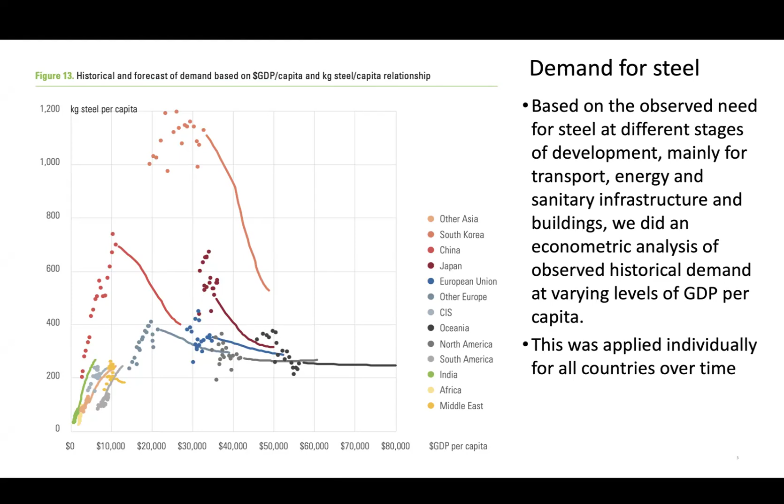This led to this picture of history and forecast steel demand by major region. You see the increase in steel demand from the early 2000s through to 2020, and it eventually stabilizing out at about 2.2 gigatons in 2030, with a stabilization occurring because while steel demand is dropping in China, it is increasing in other parts of the world, specifically India and Africa and other parts of Asia, with most of the OECD being roughly stable, mainly for replacement of existing steel needs.

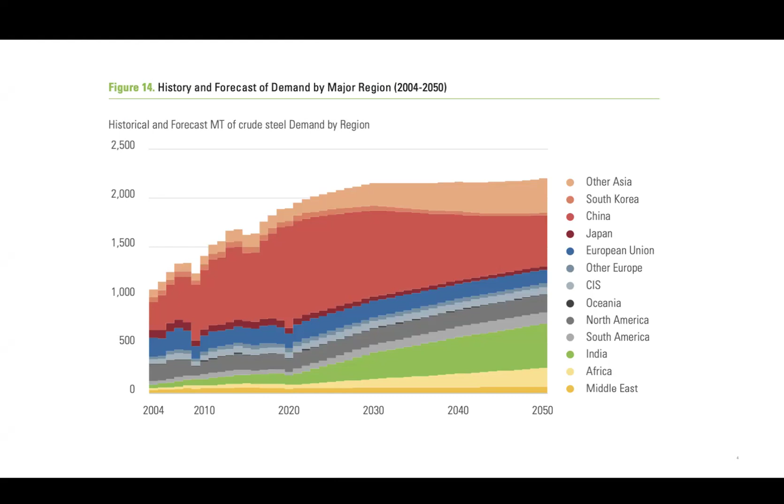Now, to briefly review for those who are not familiar, I will review how steel is made both by the primary and secondary routes. First, about 70% of steel was made using fresh iron in 2020, where fresh iron was combined with metallurgical coal inside a blast furnace, and then the liquid iron is sent on to what's called a converter or basic oxygen furnace, which sets the correct level of carbon.

This pig iron is then moved on to the refining stand where it's combined with necessary alloys to make whatever grade of steel is required, and then it is cast and pressed into the various shapes and forms that are needed, the longs and flats, with longs being generally structural steel and flats being things like flat steel for making cars or pipes.

Now, the second route is the secondary route where we use scrap iron, and about 25% of steel was made this way in the early 2020s. Scrap is brought in, it's sorted, and as much copper and other contaminants are removed as possible. It's then melted in an electric arc furnace, and the liquid steel is then moved on to the refining stand where the correct proportions of different metals are set for whatever grade of steel is required.

You'll notice that 70 and 25 add to 95. 5% of steel demand is met with what's called a direct reduced iron furnace. And I'll tell you a little bit more about that in just a moment.

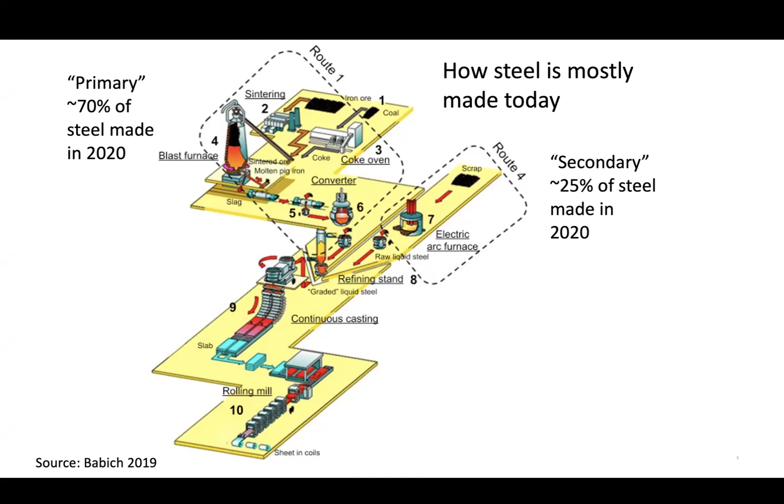Now, a key thing to note is that 85% of steel greenhouse gases come from the blast furnace basic oxygen furnace route, where coal is brought in as the reductant and heat source, and the coal is oxidized to CO2, which is released to atmosphere.

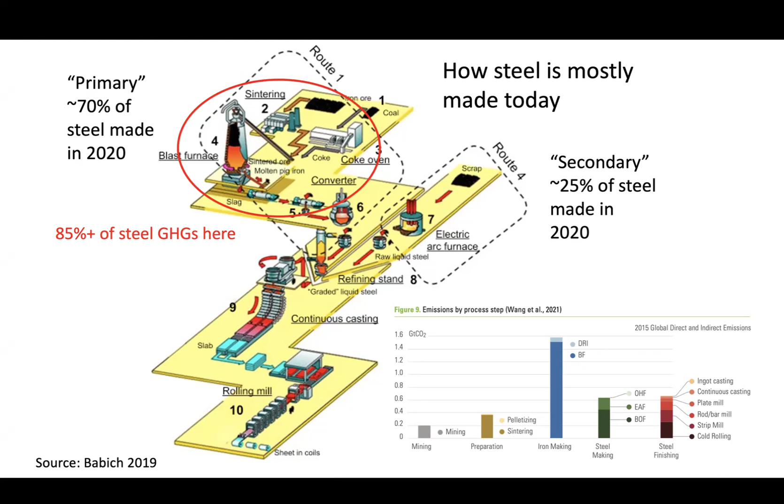For the secondary route, the primary source of emissions is the electricity for the electric arc furnace. And if we can assume there is policy to decarbonize the electricity supply and to replace all the heating with electricity, this route can be largely decarbonized with only a few residual emissions. And I do encourage you to download and read our report for details.

Now, starting with the Global Energy Monitor's Steel Database, the global steel fleet was geospatially mapped out by location, size, type, and age, creating a baseline emissions picture for the simulation to start. We have a mapping of the age and spacing of facilities in the world out through time, starting in 2021, with the reds representing blast furnace basic oxygen furnaces, the yellows representing electric arc furnaces, and the grays or dark greens representing syngas DRI furnaces.

You'll notice that most of the world's steel production capacity is in China, just over 50%, spread across the country. And the rest of Asia holds most of the other proportion, with just about 130 megatons in India and fast growing. Lots of production in South Korea and Japan, and there has been since the 50s and 60s. And then we also see a lot of steel production in the Middle East and other parts of Asia.

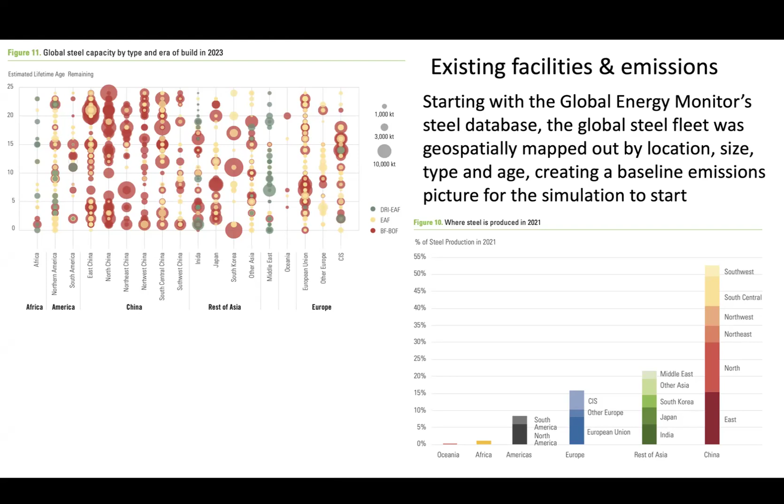The European Union is still a strong legacy steelmaker, and in the old CIS or residual countries of the Soviet Union there's still quite a bit of steelmaking capacity, with the Americas in the tail end representing just under 10% of total production. You'll see how this maps out globally in the bottom left here.

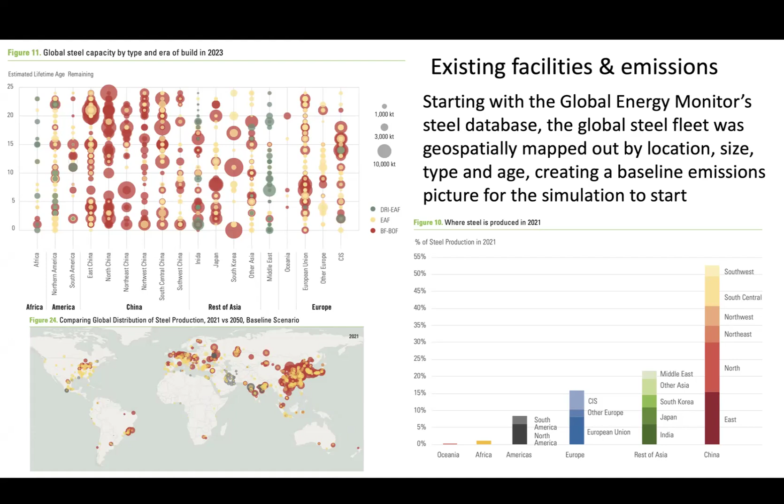The reds represent blast furnace basic oxygen furnaces, the yellow electric arc furnaces, and the grays syngas DRI furnaces. You'll notice in North America, it's mainly electric arc furnaces now, with only a few primary facilities left. So roughly 70% of U.S. steel is made with scrap, and 30% with the primary route.

China produced a lot of steel through the early parts of the 2000s. This is going into buildings, infrastructure, what have you. And it's estimated a lot of this could come out and be available for scrap for production as we head out through 2050. It's one of the biggest increases in sources, with most other regions seeing this as well. Now, remember, this is the maximum amount of scrap that's considered to be available from the literature. Not all of this will be used.

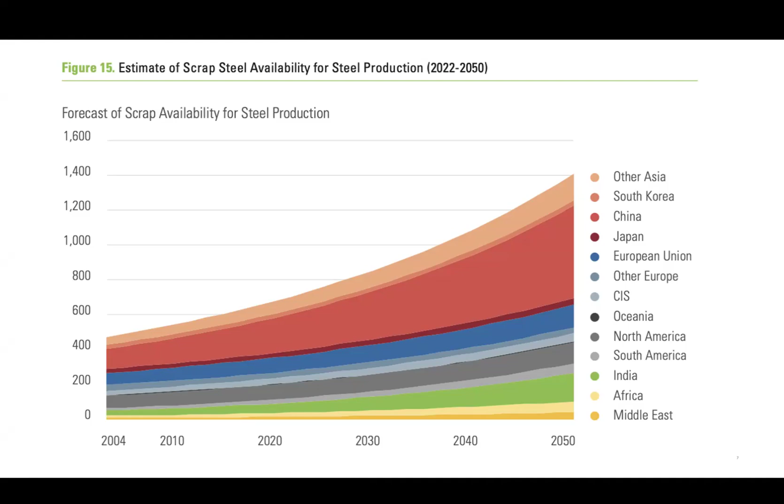We now provide the following bolded options for decarbonizing primary iron ore reduction and steelmaking. First, up to 26% reductions through design for material efficiency by 2050 are incorporated in our demand. More recycling. As we noted earlier, there's more scrap going to be available, but it depends on the supply of scrap and a network to gather it. An interesting thing happening in the US is there's a lot of combination of scrap and primary iron. It's been quite regular to make 50% scrap, secondary and primary steel, and some companies are going as high as 80, even 90%.

We do not have blast furnaces with carbon capture included in the analysis, simply because not enough progress has been made with these to bring them into the steel fleet by the late 2020s. This is unfortunate because they can use poorer quality ores, but they simply have not been commercialized. This could change, however. There are other promising coal-based technologies, advanced smelting with CCS, where oxygen is injected. There's no coking. It produces relatively pure CO2, which is easier to do CCS on. But unfortunately, this technology seems to have gone somewhat dormant.

Which brings us to the DRI technologies on the right. 5% of the global steel fleet runs off DRI, based mainly off gas, but there are some coal facilities. The gas or coal is turned into a syngas of hydrogen and carbon monoxide. The monoxide provides the reaction heat. The hydrogen takes away most of the oxygen as water. And you get a halving of emissions intensity going from the blast furnace basic oxygen furnace route to DRI EAF. It is unfortunately designed for better quality ores, and there are less of these available.

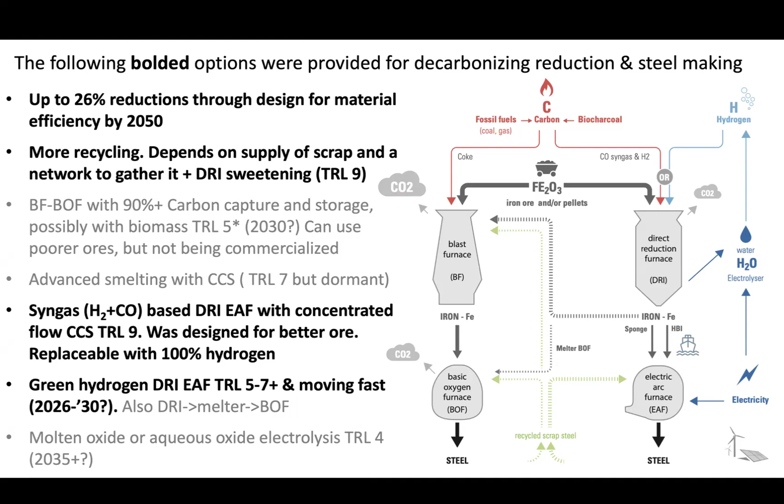The key thing here is that the syngas of hydrogen and carbon monoxide is replaceable with 100% hydrogen, which can be made either from methane or from electricity. And most investment has gone into the green hydrogen DRI route, mainly in Europe, but now there are some facilities announced in the US. This technology has been moving very fast. The only thing holding it back really is the availability of clean electricity to make hydrogen and the availability of adequate ores.

Now, I'm going to describe the scenarios that we explored. We did hundreds of different runs, and they've been distilled into the 4 scenarios here: our baseline scenario, which is just a continuation of today, narrow club, broad club, and broad club fossil fuel ban.

And I'm going to talk through these in terms of their climate club membership, the shadow carbon price schedule, or strength of policy. It doesn't have to be a carbon price. It could be various regulations, tradable standards, what have you, tariffs that are applied, and then subsidies.

So starting with baseline, there's no climate club, there's no carbon price, there's no trade tariff except the existing ones that are applied in 2021, no climate tariffs, and no subsidies other than the existing subsidies that are applied.

Narrow club has the EU and the EEA, the European grouping, the North American trading partners, the US, Canada, and Mexico, South Korea, Japan, Australia, and New Zealand grouped together. They apply effectively a carbon price of $100 to $300 per ton to their steel fleets. The rest of the world watching this applies something like $30 to $100 per ton.

The key thing is the Climate Club members apply a border carbon adjustment, both between each other and to the rest of the world, and a strict 30% border carbon tariff going from the Climate Club to the rest. So any steel that tries to enter the system has to pay a border tariff plus a border carbon adjustment. Within the Climate Club, we also have a subsidy on green iron reduction technologies of $100 per ton to represent subsidies to drive process innovation.

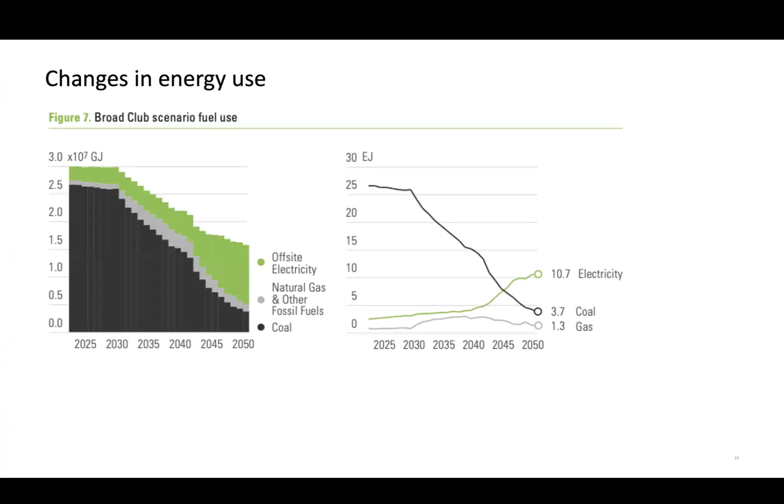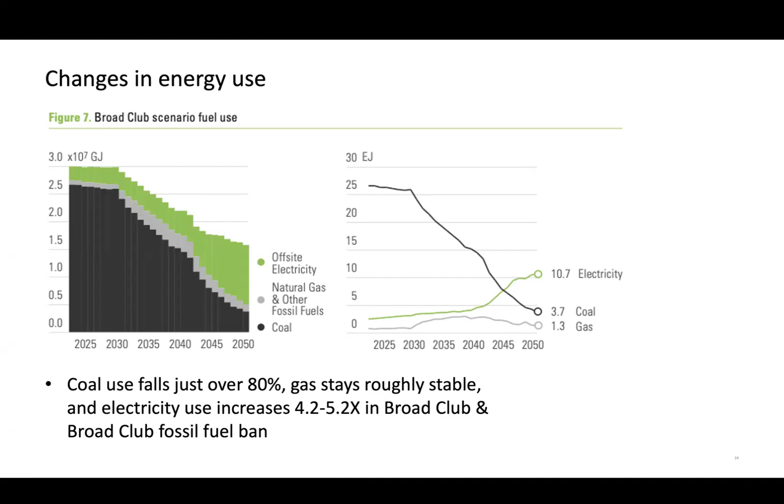This slide provides changes in energy use. You'll see that coal use falls just over 80%, gas stays roughly stable, and electricity use increases 4.2 to 5.2 times in Broad Club and Broad Club fossil fuel ban. A key thing to note here is some regions may be able to sustain these increases in clean electricity production, but many cannot. And these will be the regions that will likely import HBI for processing into steel in local electric arc furnaces. Most of the electricity is involved with making hydrogen to create the reduction gas in a direct reduced iron furnace.

Green iron majors are critical to this transition: Brazil, Australia, Canada, South Africa, Ukraine, India, US, Guinea, and Venezuela. What we included is based on reserves that we could find in the literature, and they added up to just short of 300 megatons. Two things could happen. We could see more reserves discovered and brought into play, or we could see beneficiation or upgrading of poor quality ores, or breakthroughs in using older, poorer quality ores, such as the goethite in Western Australia, and creating a DRI grade pellet out of it. And many of the iron mining processing companies are working on this today.

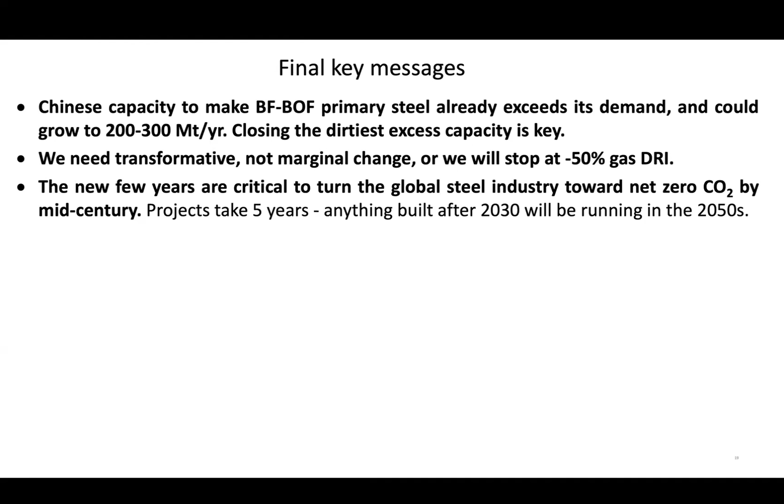The next few years are critical to turning the global steel industry towards net zero CO2 by mid-century. Projects take at least 5 years to permit, to analyze, to finance, and finally to build. Anything built after 2030 will be running in the 2050s. Clean electricity requirements could increase 4.2 to 5.2 times in the broad club and broad club fossil fuel ban scenarios, which may stress some countries' capacities to deliver. This is where trade in hot briquetted iron could be absolutely critical for allowing some countries to carry on making their own steel.

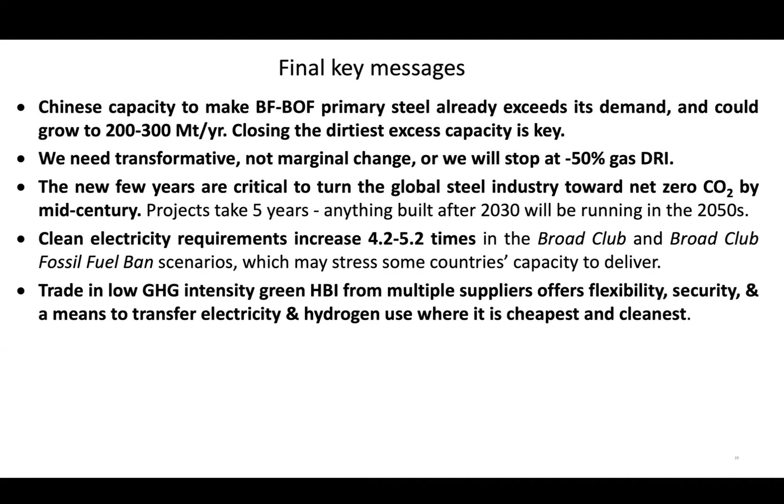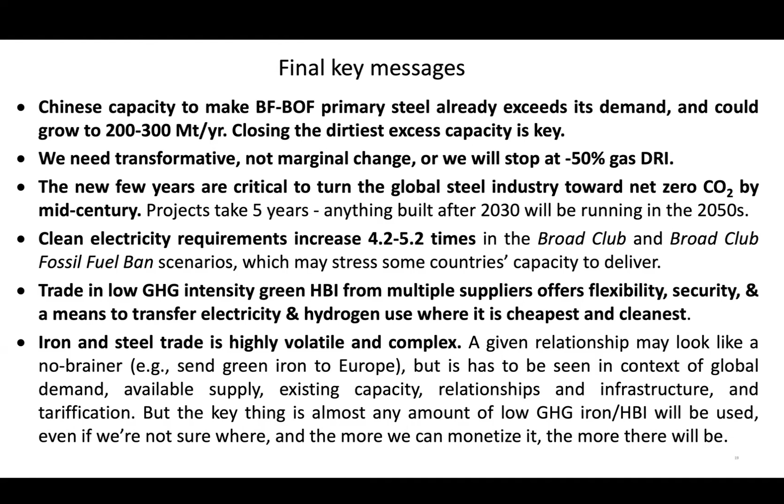Trade in low GHG intensity green hot briquetted iron from multiple suppliers offers flexibility, security, and a means to transfer electricity and hydrogen use where it is cheapest and cleanest. Iron and steel trade is highly volatile and complex. A given relationship may look like a no-brainer, for example, sending green iron to Europe, but it has to be seen in context of global demand, available supply, existing capacity, and relationships and infrastructure and tarification. But the key thing is almost any amount of low GHG iron and hot briquetted iron will be used, even if we're not sure where, and the more we can monetize it, the more there will be.